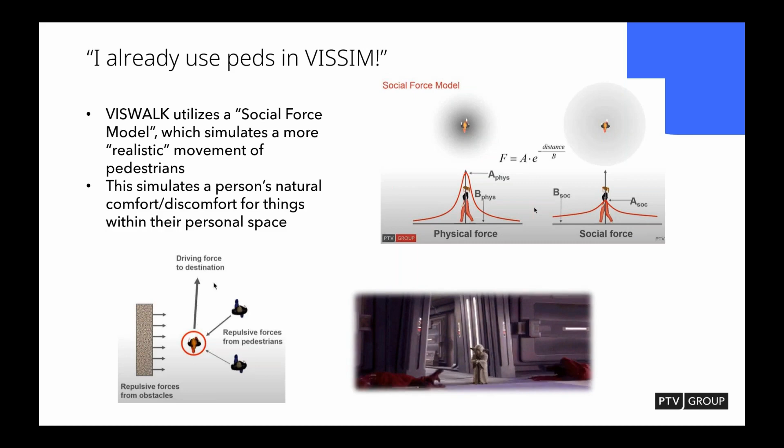Another question I get a lot is, don't I have VisWalk already? If you take a look at Vissim and ask it as an add-on, how do I get it? How do I bolt it into my software? But wait, aren't I already using it?

If I open somebody else's model, it doesn't say VisWalk not enabled. You might have noticed it right there in the corner. VisWalk was originally developed as an add-on to Vissim, but from a software functionality standpoint, they are married together in the way that they're in the same GUI.

Where you've got to look is in your license file here. I'm guessing that most of that 61% of you, and probably another 20% beyond that, your number there says 30. And 30 is the default in Vissim that says you don't have VisWalk. I know that's super confusing, but the reason it's in there is both to show functionality and to allow the building and sharing of functionality between models, without having 1,000 different versions of Vissim and bolting it on.

And did I do it correctly? Did I export it to a different software correctly? All of that stuff is unnecessary. It's already in there. What you're buying is access to populating your model with pedestrians.

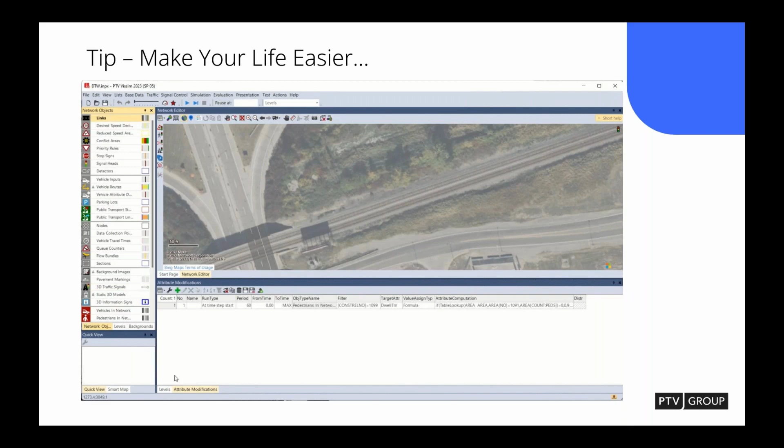Here's a little tip and trick for y'all. You can actually turn on the components that you want to see and only see those. So if you're doing a VisWalk only model, you can turn off all vehicular components. If you're doing a Vissim model, you can turn off all your VisWalk components, and vice versa, however you need. That kind of makes model building a little bit easier, and anything that makes my life easier and doesn't replicate and doesn't make me get confused, I'm all about.

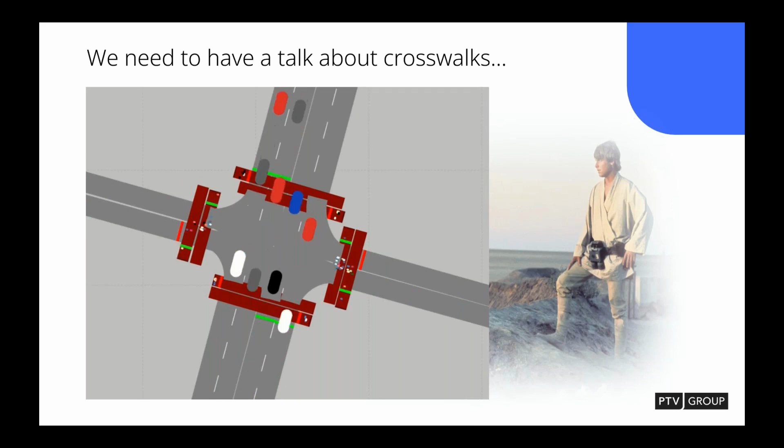So let's move on, we need to have a little talk about crosswalks. I think anyone who's ever used Vissim may be familiar with this picture. This is what we call the classic view of pedestrian modeling in a Vissim model. There's nothing technically functionally wrong with this model, it's just so 1990s, early 2000s.

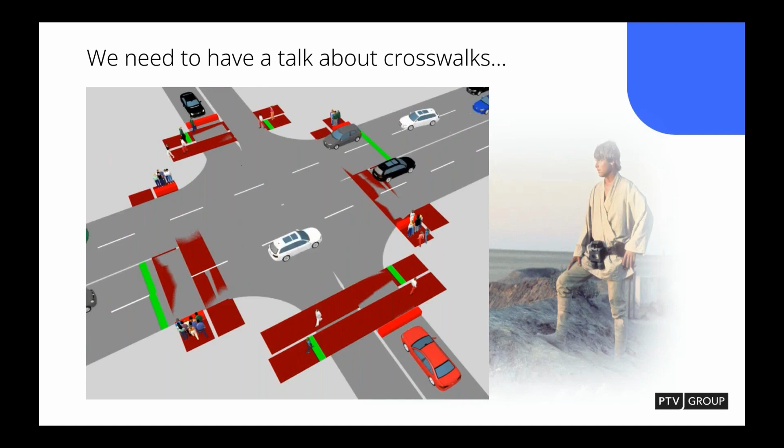And the way I like to think about it, let me see if I can get to the next slide here. When you think of a city, what are humans? The traditional component of using pedestrians with vehicular following models just isn't reality anymore. Cities are more vibrant, people move within each other, they use the micro capacity of the system. There's a lot of error in their movement together.

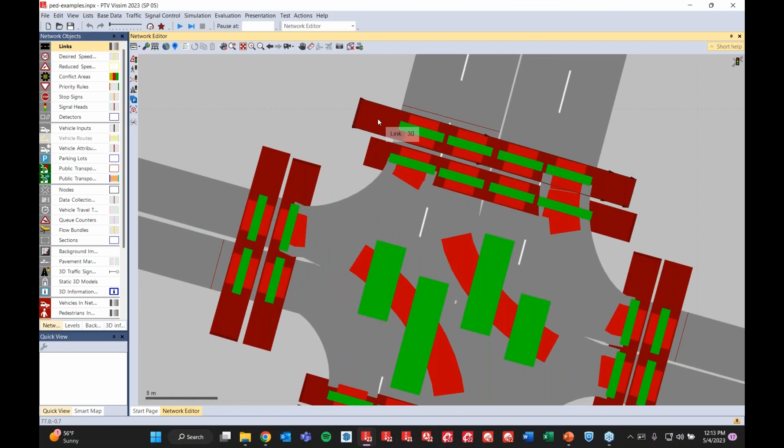So here on the right, you have your traditional model. Makes perfect sense. You have your pedestrian inputs, you have your walking ways, but these are actually vehicular links. And when you get in here, you do have this footpath, no interaction. But this no interaction setting deactivates the vehicular elasticity in the Vissim model to prevent collision, right?

And that in its inherency means that pedestrianization in this way is simply a reflection of the Highway Capacity Manual's idea of capacity of pedestrians, and not the realistic idea that you should think of it like particles within a limited space, right? They bounce off of each other. That can both be negative and positive depending on the situation.

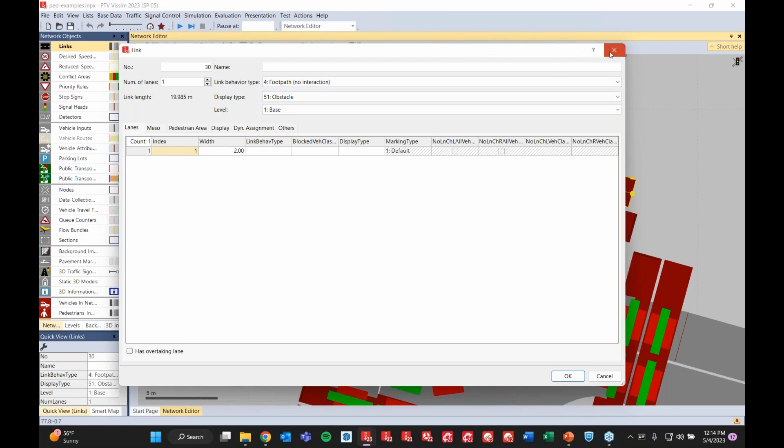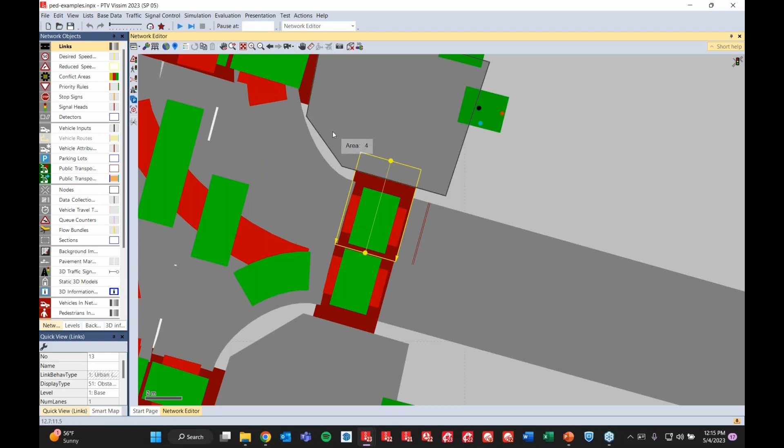A more realistic way of building a VisWalk model is like this. You have your waiting area for curbside on each approach, and in Vissim, if you click on your link, you'll have a component called pedestrian area. When you click this, most of the vehicular components related to the following model are deactivated, and the link functions more like a pedestrian area and less like a vehicular link. But since it's still a Vissim link, you can add in the conflict area between vehicular and pedestrian movement, which you can't get with a regular area. So this is a much better way of doing it.

All right, fingers crossed. I'm going to push play here and let these models run a little bit.

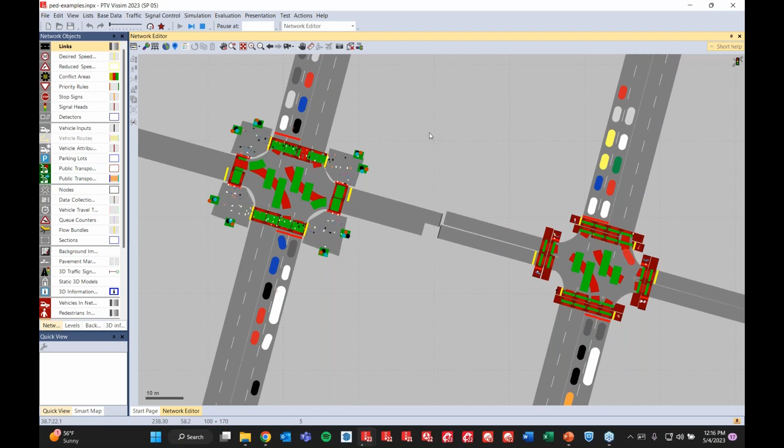I was going to make it more of a surprise, but both of these models have the exact same amount of vehicles, the exact same pedestrian demand produced at the same rate with the same destinations. But watching it over a few seconds, you can immediately tell there's a major difference in the functioning of capacity and the roadway, whether it's the green time for walking, the clearance time, or the friction between the pedestrian entering the roadway and getting to the crosswalk, and everything in between.

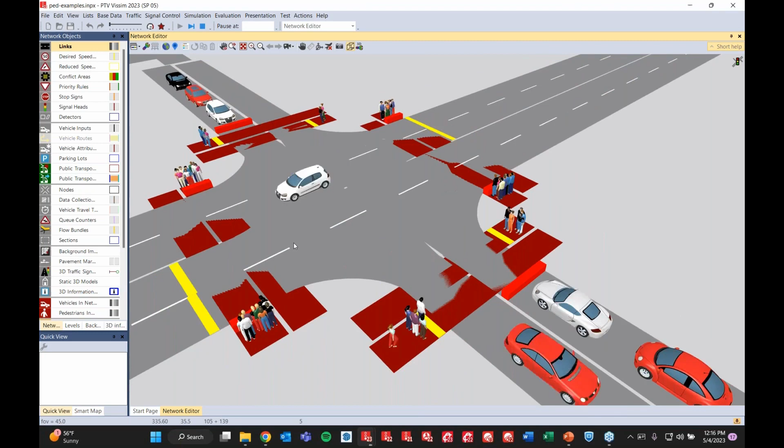And then when you put it in 3D you get an even better idea. This is what I'm talking about, that robotic thing here—when you're using the vehicular following model with pedestrians, they just kind of walk like cars. Whereas if you come over here, this is the exact same demand but using a realistic static demand.

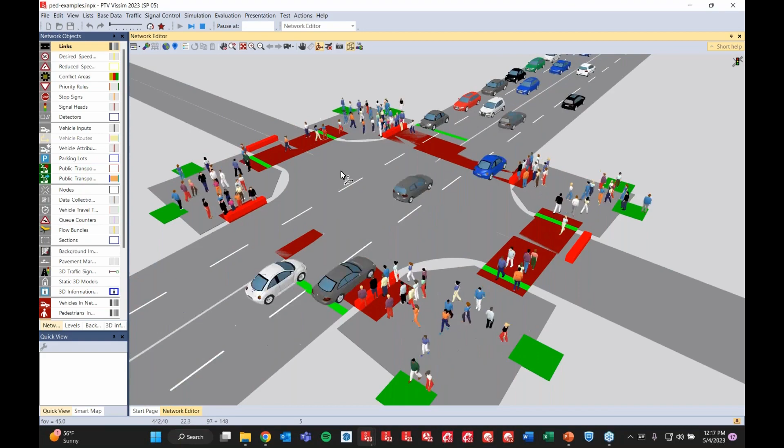The people are walking to their destination. They're trying to avoid other pedestrians, trying to do things reasonably, reacting to the environment in a realistic way.

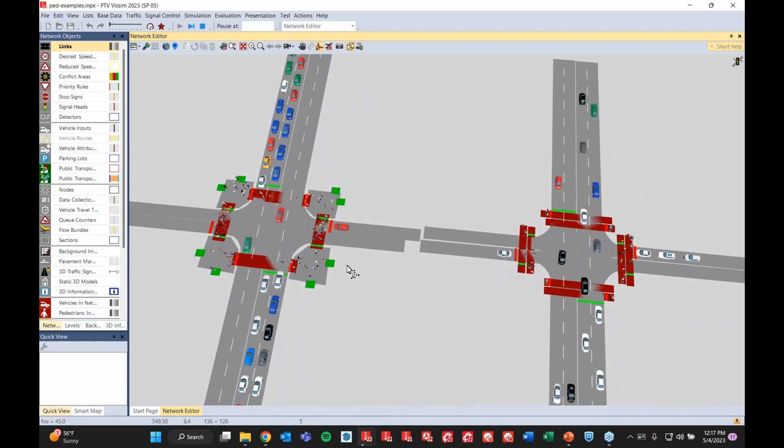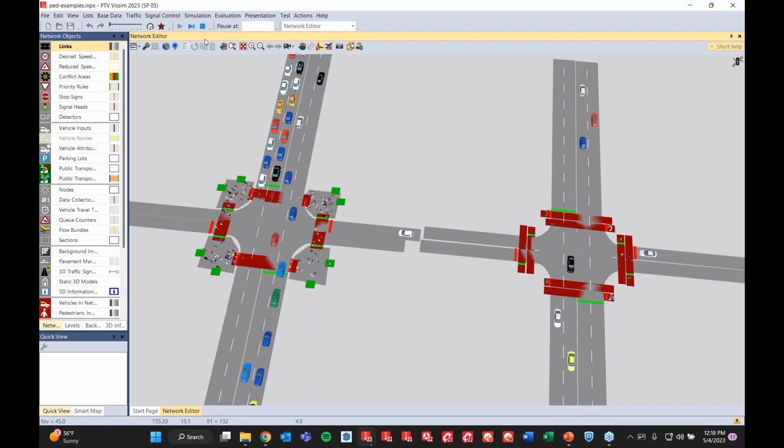Immediately we can see that if you're looking at a VISSIM model or design—and this is the simplest design you can get—in terms of pedestrian capacity, safety, the ability to measure elderly people crossing the walk, people with limited mobility, the realistic right turn factor versus the highway capacity right turn factor, the breakdown of lanes, signalization, and even advanced signalization—just something as simple as a crosswalk shows the major difference between using VisWalk for pedestrianization versus the old way, the highway capacity or synchro method for pedestrians.

All right, we're going to go back to listening to me drone on a little bit.

All right, the curbside strikes back. Curbside means a lot to a lot of people. To some it's the end of your journey, to some it's the beginning of your journey, but to VISSIM and VISWALK it's more like the transition of your journey.

Let's see if this video plays, I'll give it a second. For anyone who came to the Detroit airport presentation, you'll recognize this—this is the point of the airport model where the cars are dropping off the pedestrians into the airport.

This doesn't really look like a lot. Sorry, I need to turn off the auto on my thing.

It may not look like a lot, but this is actually the transition point right here, where once the pedestrian enters that crosswalk, the waiting area exiting the bus stop—which in this case represents the drop off. Oh come on, take a break. I apologize for my technical errors here.

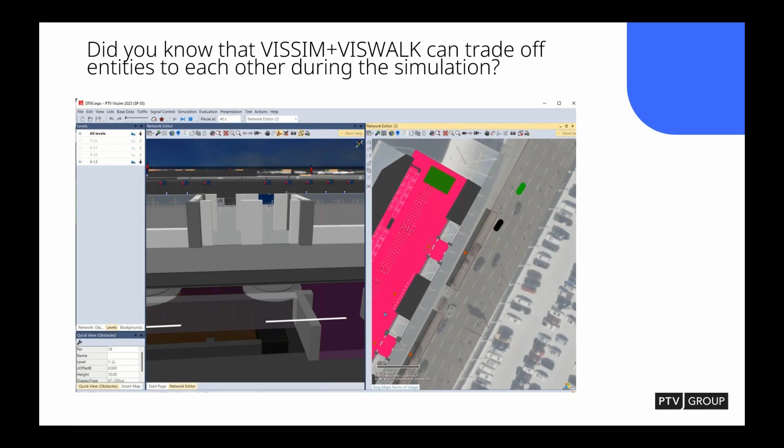So that's basically the transition point between where a VISSIM model becomes a VisWalk model, and you can do vice versa with parking and with boarding and alighting of transit vehicles, the public transit vehicles.

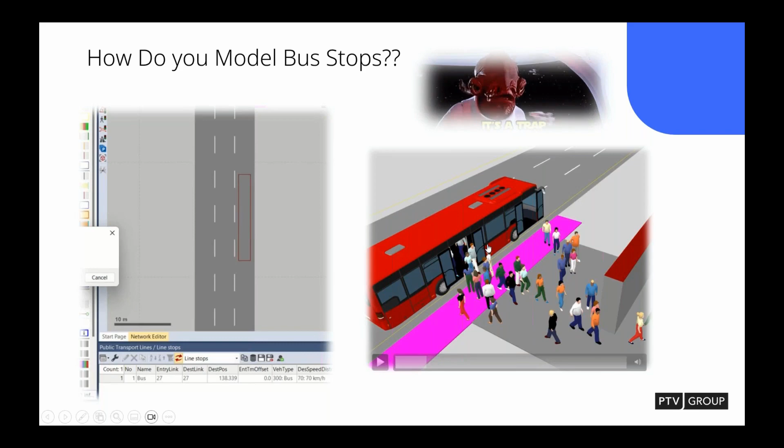So very few people actually do this the correct way, and that's because if you look at this slide, I pulled this straight out of the VISSIM manual on page 1005 under 4.2.22.2 quick start guide, and here's the map right here. All the stuff is built into VISSIM natively to do this, and here we've got a bus stop, which I'm going to show you in just a second. You should write this down, page 1005, because I have that on a sticky note on my desktop so I can find it for this map of all the different components. But I'm going to show you the components because it's a lot easier.

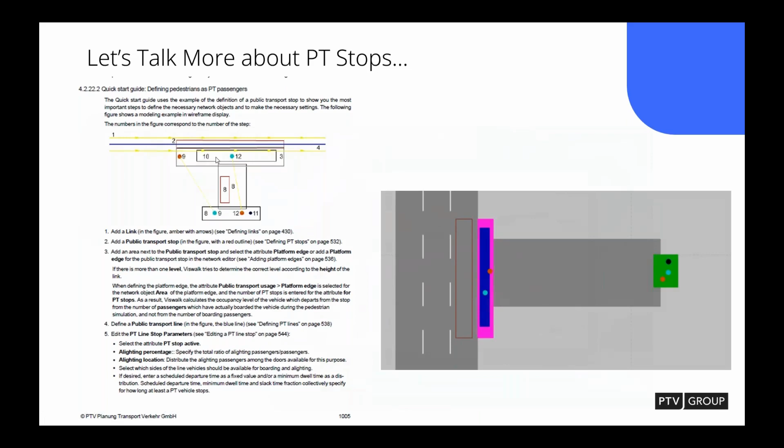All right, so let's do this again. Let's move it into our nerd view here. All right, here's the map I just showed you.

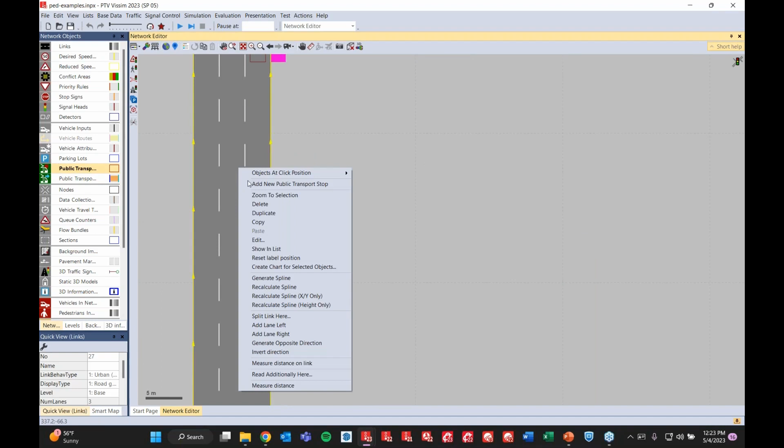This is what I'm talking about, a precipice or boundary between the VISSIM and VISWALK models, because in order to get this integration, you need both the VISSIM and VISWALK components, right? And they're natively built in. Because if you make a normal public transit stop, you just get the normal boring boarding data like that.

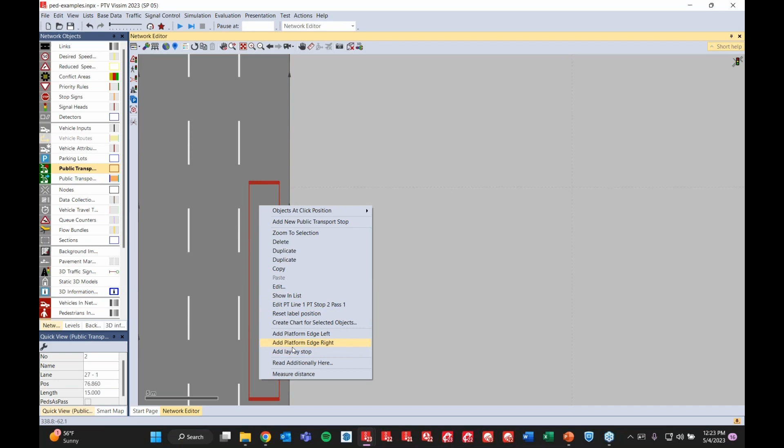However, here you can actually, if you come to this stop, if you create a new one, let's just do that. You click here and you've got all of these things built in right here to use with VisWalk down here. Add platform left, add platform right. And when you add a platform right like that, it automatically creates the platform in the place it needs to be to start the VisWalk model, right?

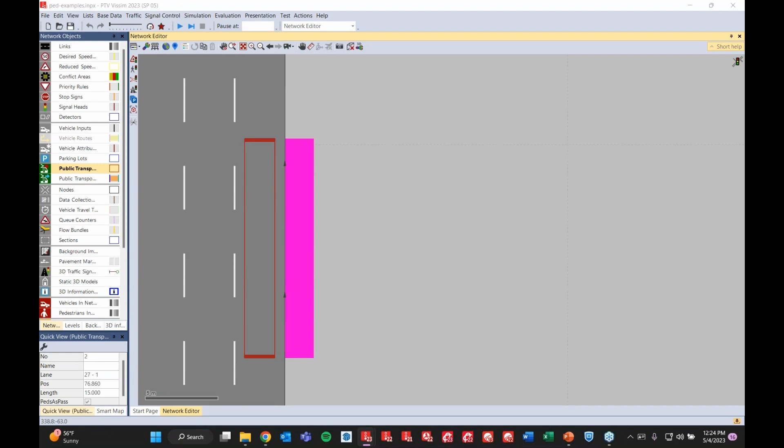And now you have this line here, edit PT stop, and you've got your more detailed public transit stop stuff, right? The doors and stuff need to kind of match in your vehicular component. I'm not going to talk about that right now because that's more of a VISSIM thing, but you can reach out to me if you want to talk about it.

You have to build the doors into the model by telling them where they are, but then you can come in here and tell them at each stop which doors are possible, right? So if it comes to a stop, if you say all the doors can be used and it comes to a stop on the right, it will only use the doors on the right. If you come to a stop that has both, they will distribute evenly based on their VisWalk destination, kind of.

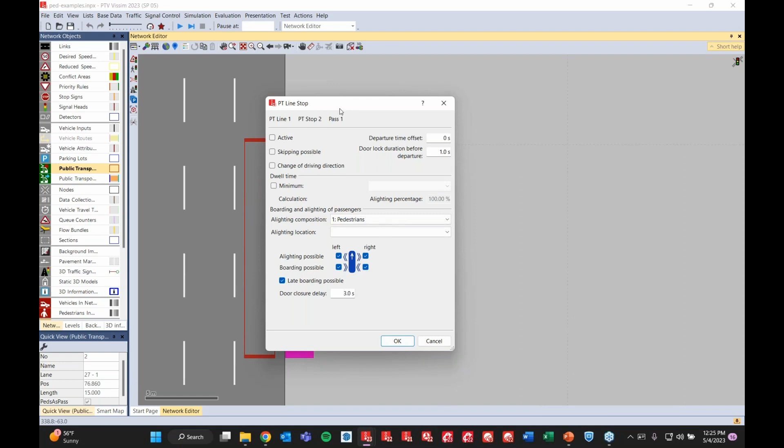And you can build different waiting areas, but basically the boarding area, the picture here, this pink area, the door has to be somewhere within this area. Generally stops are a lot bigger. You've got late boarding, you can change compositions for different stops. You can have skipping possible if there's no pedestrians or no boarding.

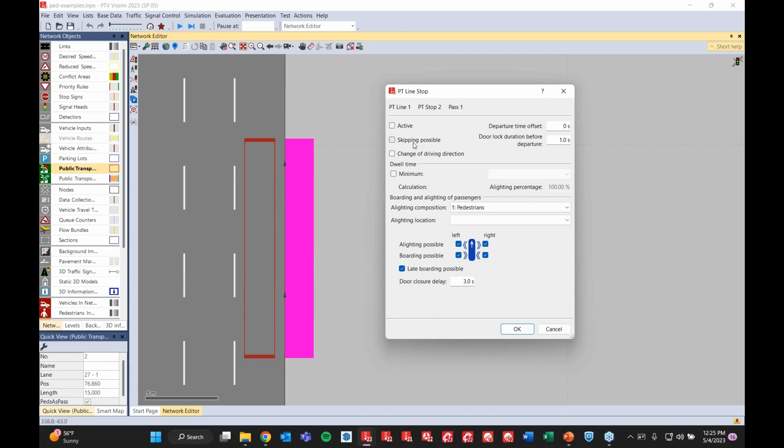This is actually really interesting. I'm not 100% sure, but the skipping possible, they will pull away if someone's running to the stop but not close enough, which is actually kind of funny when you see it in 3D. But you see there's a lot of cool components here.

But these are all the components that are necessary. This is the simplest way to describe it. In my airport model, it did the same thing. You need to have a starting point and you need to have a platform edge. But within your platform, you need to have your waiting area.

And this is one of the misunderstood things, you need to have this waiting area within your platform area. It can be multiple ones. You can have 100 different waiting areas, but it has to be within. And when you create the platform, it will automatically set this information for you on the second tab of your pedestrian area, platform edge, and set it to the bus stop that it is here.

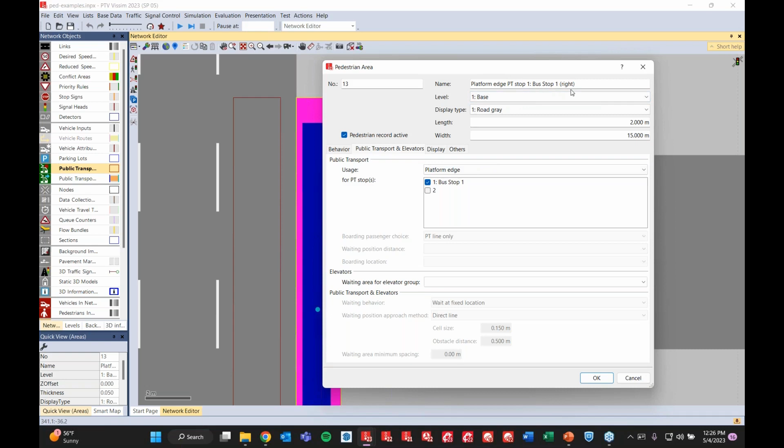This is also, I've said it in every talk, why I recommend naming your things, because it's really hard to come back and see bus stop 1, location 2, location 5. None of that stuff means anything. Platform edge, PT stop 1, bus stop 1, right, that makes a lot of sense in my presentation and demonstration, but it doesn't make a whole lot of sense when you're coming back doing reports and models and client presentations.

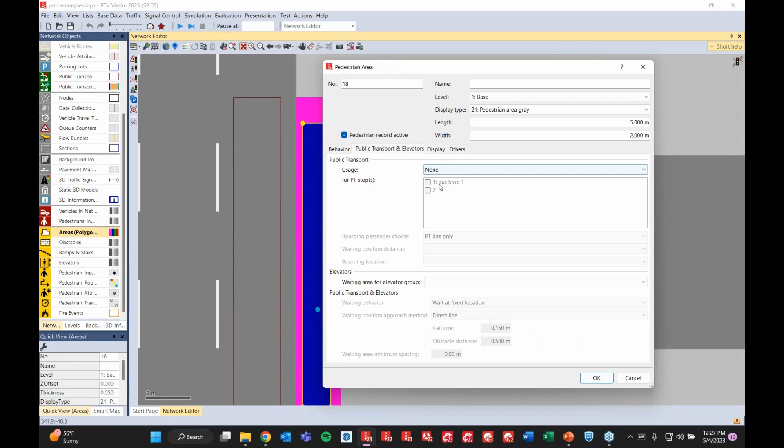So that's set automatically, but when you make your waiting area, you have to come in here and set the waiting area, because when you make a new area, it's going to be blank, right? So you have to set this in here. So when you're going into the PT area, you have to set your destination to the waiting area.

Right here, this red to blue. When you're coming off of the bus, you have to set it to the platform edge, not the waiting area. So the people getting on the bus go to the waiting area, and the people getting off the bus start at the platform. Then you have to tell them where they're going to go, because if you don't, they'll just disappear as soon as they get off the bus.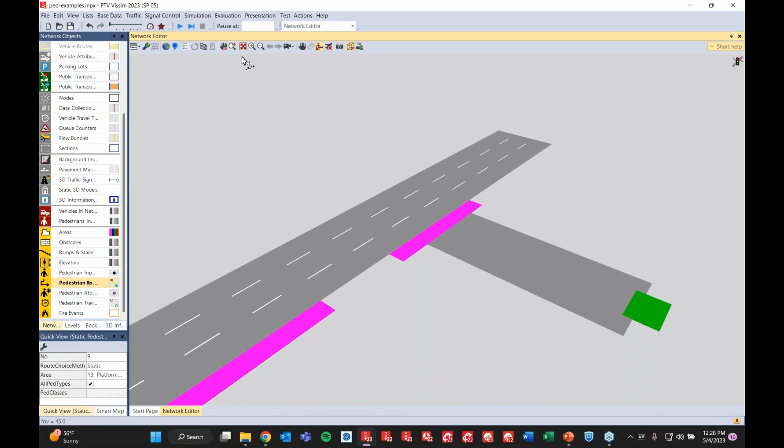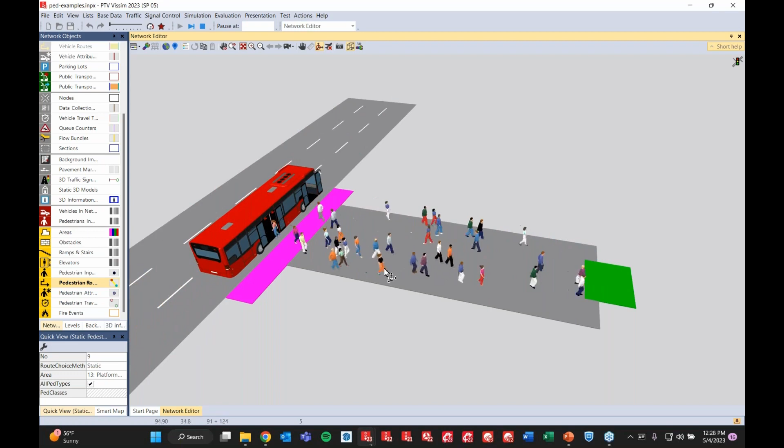So if you do it right, you should end up with something like this. This is dynamic, which means that every time you add something, people will just function to that thing. All the components are already built in. Maybe it's better to show an example. Let's just throw this guy in here.

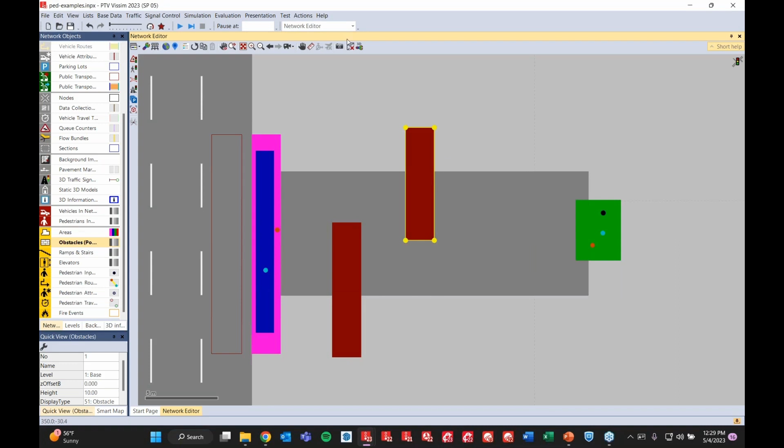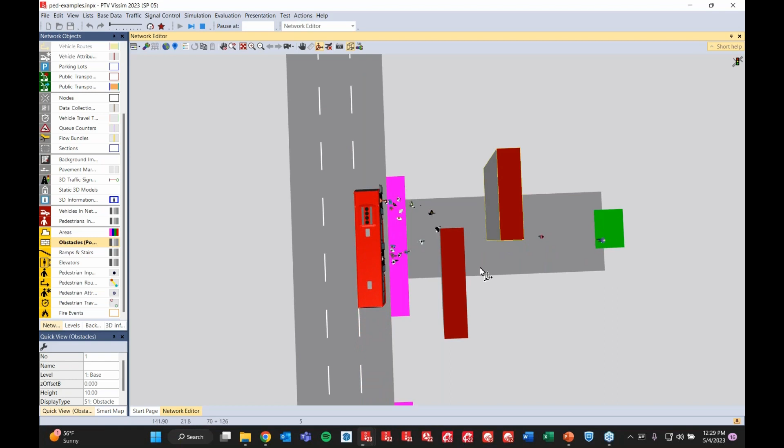So this is a good way to use VisWalk to stress test different designs super quickly. You can see that the people getting off the bus affect the people trying to get to the bus, see, he missed it, oops, because the demand is getting off. You would never capture that in formulaic analysis, which is why we always recommend using VisWalk for public transit studies.

All right, I'm going to stop that there. Maybe that would be a good place, Tiffany, for question number 2.

Okay, question number 2 is, do you have any projects that require more robust pedestrian simulation treatments or analysis?

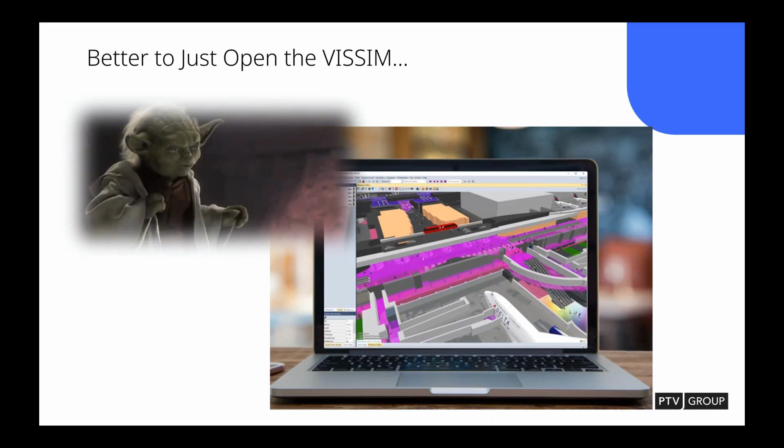And all these airport models and train station models, still it's not really much of a thing, but it should be. I remember working on complete streets projects in New York and across Europe. People want pedestrianization, cycle modeling. We just at PTV wrote the guidance for modeling in the UK for pedestrian modeling, and we really support our customers with pedestrian modeling because it is the next big thing.

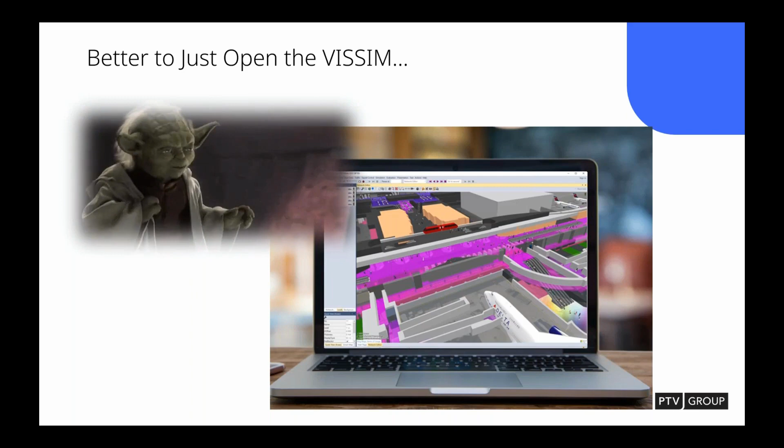And Viswalk is moving into an interesting world, especially with some of the MovePed things coming in the next couple of years out of Viswalk, with more fully articulated pedestrians, better behavioral models, and more realistic queuing models. It's an exciting world.

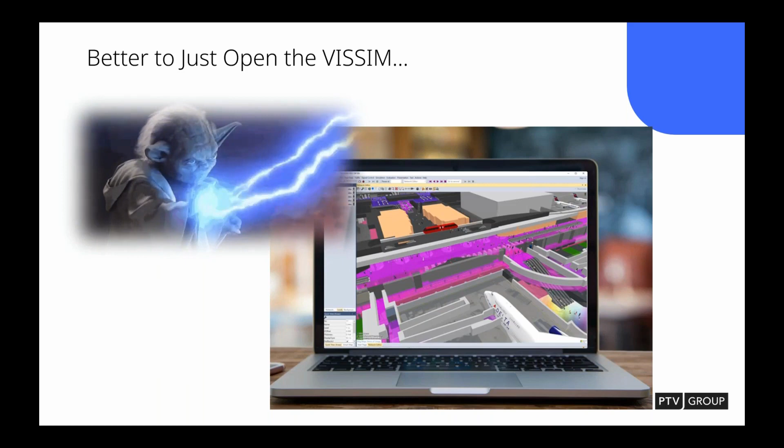So let's move on. Rise of the attribute modifications. You may have recognized our master of training over there, Levi Button, has given a few presentations and UGM things on attribute modifications, but attribute modifications really do change the way VISSIM and VISWALK work. People like me who have used the DLLs and the APIs and Python and Visual Basic scripts since the beginning of time, and they never quite work right. So the idea is scripting without scripting. We're building functionality directly into VISSIM, directly into VISWalk, to make the model better for our users.

So this is an issue I came upon the other day. I wanted to make a very realistic representation of a taxi queue. I was kind of basing it off the one at LaGuardia from when I lived in New York, where you wait at the head of the queue until you're assigned to a vehicle, right?

It seems very easy. I did a lot of the service point queue selection stuff in airport modeling, and that stuff works really well. However, there's a bit of a timing problem with things like this, that VISSIM and VISWalk give you an exacting capability to overcome.

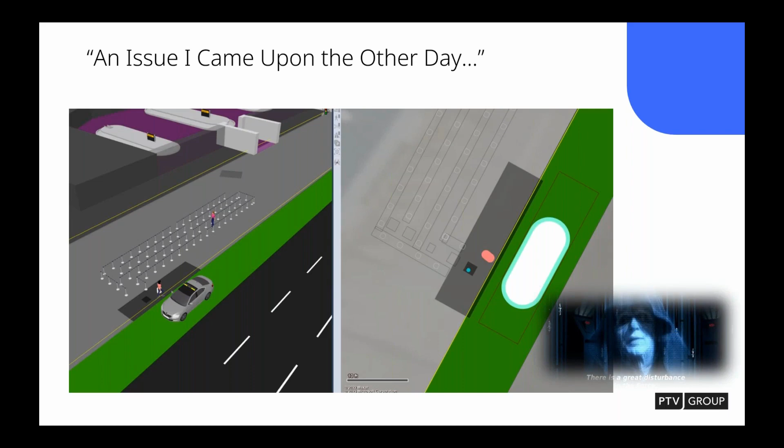So this was our discussion area. For some reason I've deleted my second text slide there, but I had two ideas of how to really accomplish this. Those squares are areas, by the way, routing areas, the path of the pedestrians through the queuing tape.

So the first idea was, well, maybe if I just make the waiting area—see, that dark black area is the waiting area for the transit stop, that's the one taxi working as a transit stop—maybe if I just make the waiting area really small, then only one person would wait in it. Oh, how I was wrong.

In Viswalk, natively, there's not any kind of thing that says the waiting area size has a lot to do with it. It's kind of a capacity analysis thing. So all I did was get a huge queue of people waiting in a semicircle to access the area that they couldn't get to, which didn't really work.

So the second idea I used was the service point selection, much like a queuing area, right? I wanted to say that the black area with the turquoise dot in it would only let pedestrians wait until that area was free.

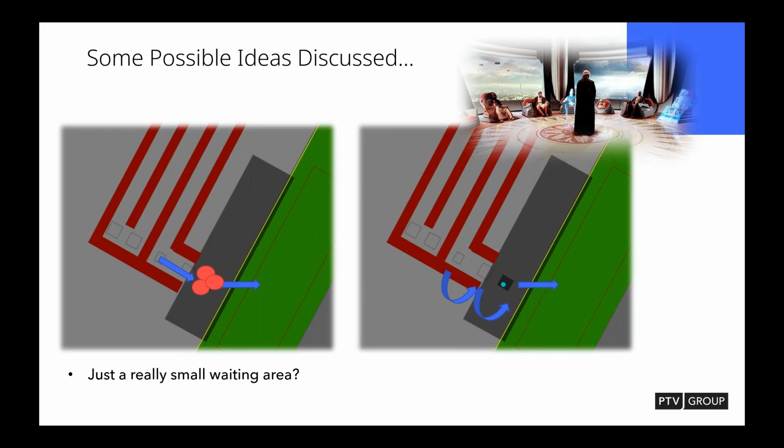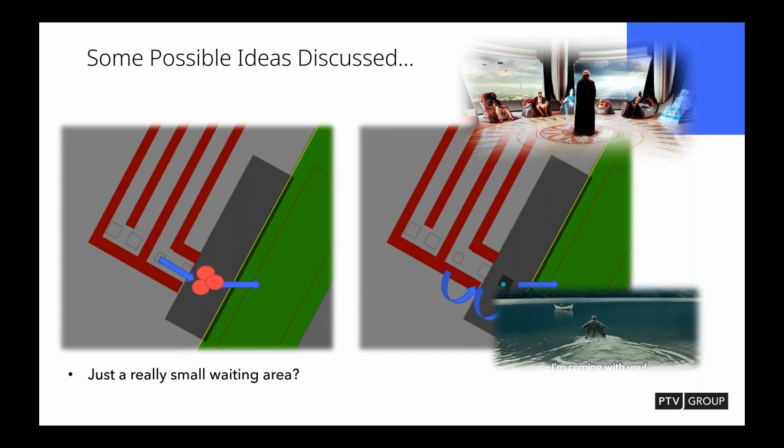However, the thing that I didn't take into account with the way that VISSIM and VISWalk works is that the idea of the service point selection doesn't act like an IO gate for the usage of the area. Any pedestrian who went on to the next area, as long as the taxi was there, just jumped in the taxi with him. There were no gates. The waiting area was only for the public transit vehicle. So that means that as long as the public transit vehicle was still in the stop, the gate was open for more and more people to just tag along, even if they weren't invited. Big fail.

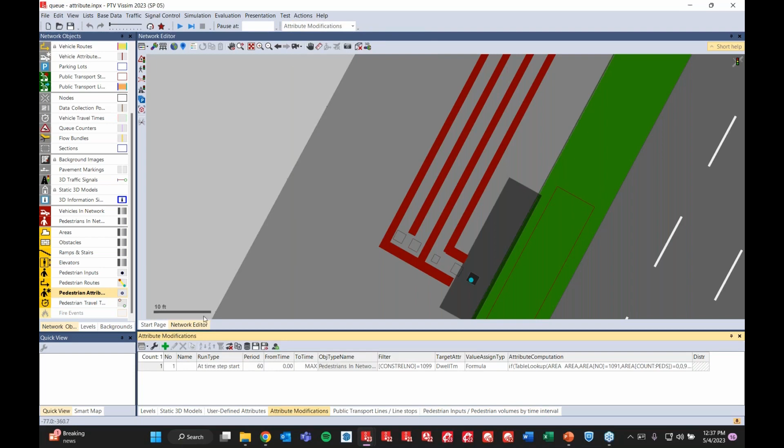So Levi actually taught me how to do this - this is the preferred method that I worked out with him based on his advice. For some reason we put all the attribute selections over here. You've got your vehicle attributes here, your pedestrian attributes here. However, what we did wasn't actually either one. It's right here, the global attribute modifications - the second to last tab under actions. You click on the attribute modifications, right? And I've got this guy right here.

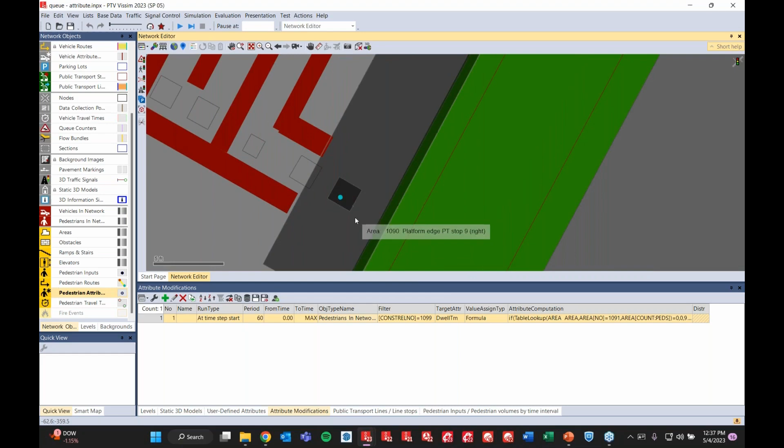So looking a little bit at our model - what we wanted was that only one person would wait here and get in the car. And they would only proceed to the queue head to wait to talk to the agent once that person got in the car and drove off. So what we did was we used all of the elements within attribute modifications, as well as other elements within the model, to kind of cheat this.

So I don't know if you know this, but with a pedestrian model, you can set this tab here under behavior time distribution to anything you want. So here I've got gate holding time for an hour. There's this other tab down here too, which is kind of cool - I used this in the airport model. Waiting time is relative to simulation start. That means the gate opening is an hour from the simulation start, so if someone arrives 20 seconds before the end, they don't wait for an hour.

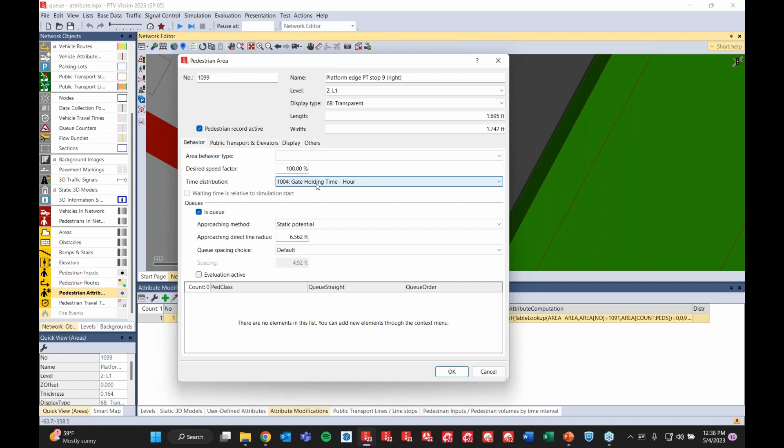But that's not relevant here. So I set the time distribution to an hour, and if you don't have a distribution, you come into your base data under distribution and time. So under here, down here, I have an hour - I mean, I guess I don't really need a time distribution. You can set a standard deviation; it really should be 0, but I'm not going to mess with it right now.

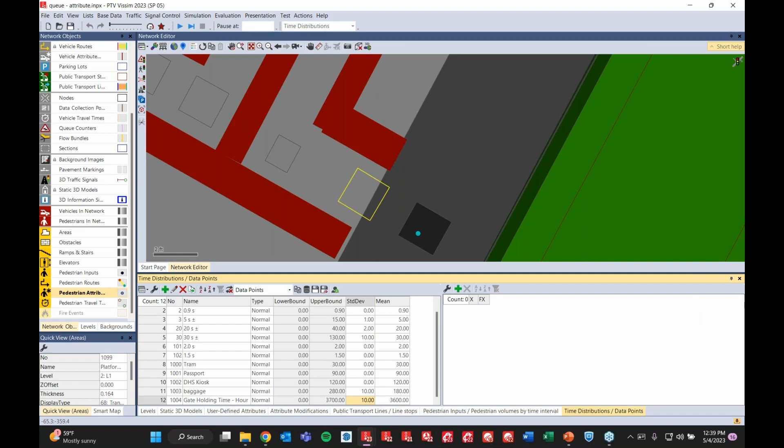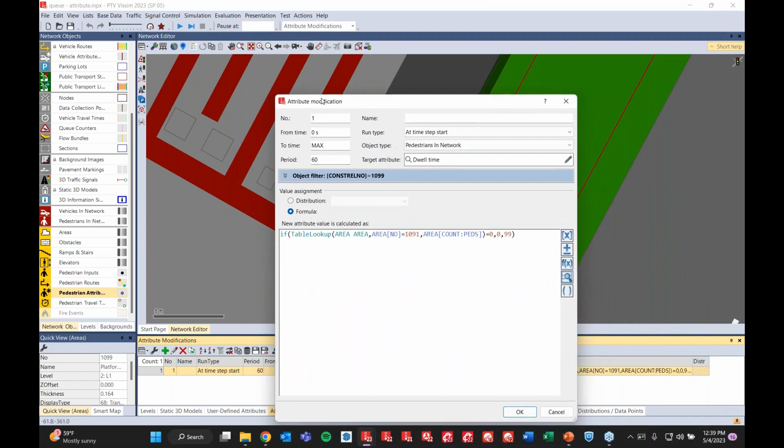So what happens is this: when a pedestrian enters this square here, basically they're held for an hour. However, through attribute modifications, I can edit VISWalk to act however I want. This is kind of, I don't know, if you know SQL, it's very similar to SQL but not exactly the same. So your construction element here, 1099 - unfortunately I have to click out of this - so there you have your construction element 1099, platform edge PT, and then you have your 1091 here.

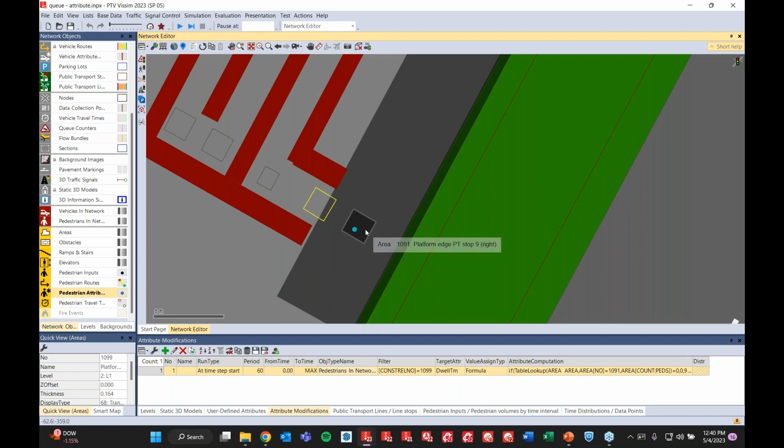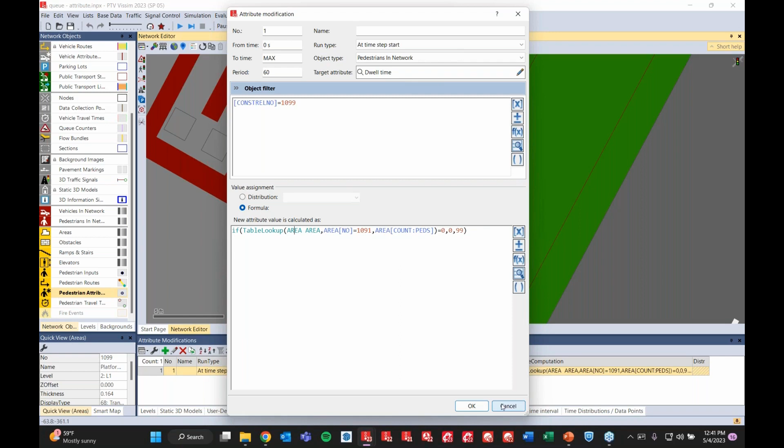Area is the waiting area. So if you open up here, you can see this formula affects this filter right here, this 1099. And here's your table, this is your SQL lookup. All your data, I believe, functions through the SQLite database. So when 1091, the waiting area of the pedestrian, has 0 pedestrians in it, then you need to set the dwell time target attribute up here in your upper right to 0. Else, basically do nothing.

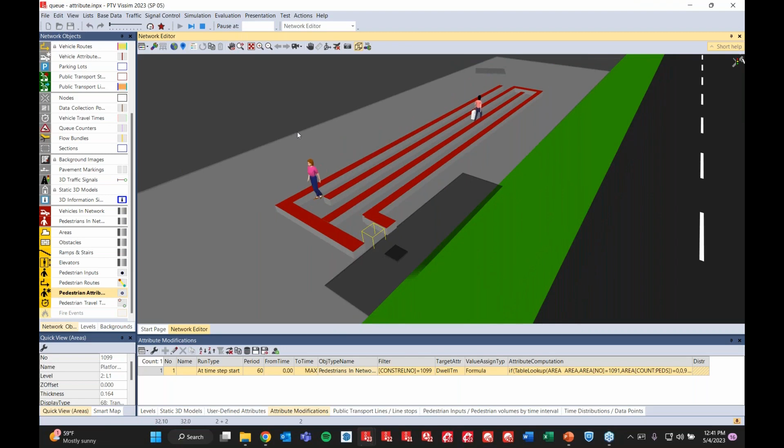So what happens is when you run your model, right now, since nobody is here, this waiting time is 0. You also should set your components of your model so that they wait for people, but I was too lazy to do it. All right, so there you go. Wondering if we could go farther into the future and see people actually queuing. There we go. All right.

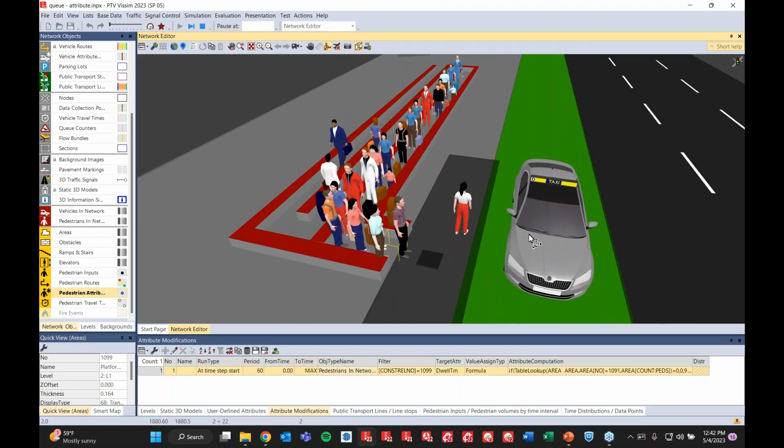See, and now they don't go to the queue head until the availability. It's important to set the capacity of the taxi, because the default for a single occupant vehicle is 2 people.

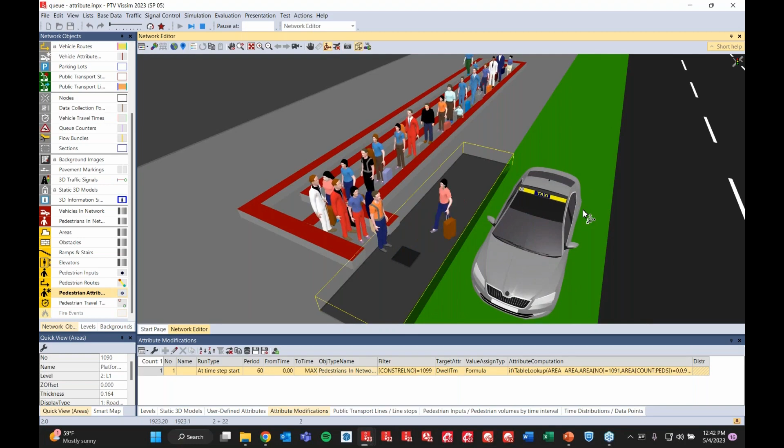See, that person was actually pushed out, so they came back. So that's actually a really cool application of gating behavior, I like to call it, using global attribute modifications.

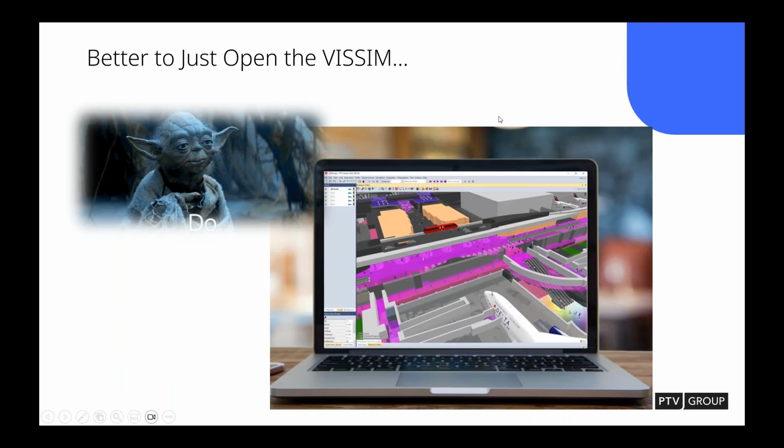Let's finish up with a bit of a thought exercise toward what we're working towards with our integration. This is what we talked about today. And you ask me, that's great and all, but what if I want my city to look more like this?

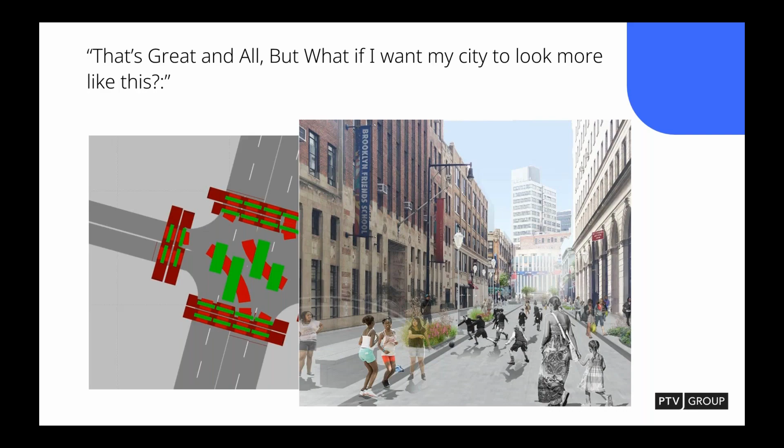Because, you know, it's the 21st century and we don't want to look like a global urban arterial. It's a cool little thing. Some people who saw it in 2022 might have seen this model in different contexts.

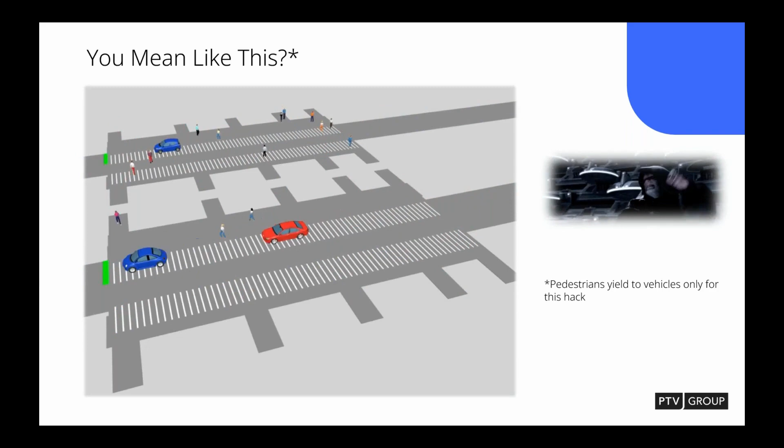This model isn't meant for cars stopping for people, but they will in emergency situations. This model is meant to show how you can get more flexible pedestrian movement, for more complex urban areas, like crosswalks and stuff.

I don't know if anyone from New York or San Francisco knows what I'm talking about, in morning rush hour when everyone's queued through the crosswalks and thousands of pedestrians walk through the queue of cars. So we've been working on this test model.

Let me see if I can open it up. And for anyone that's been in the field long enough, this definitely feels like Emperor Palpatine right there.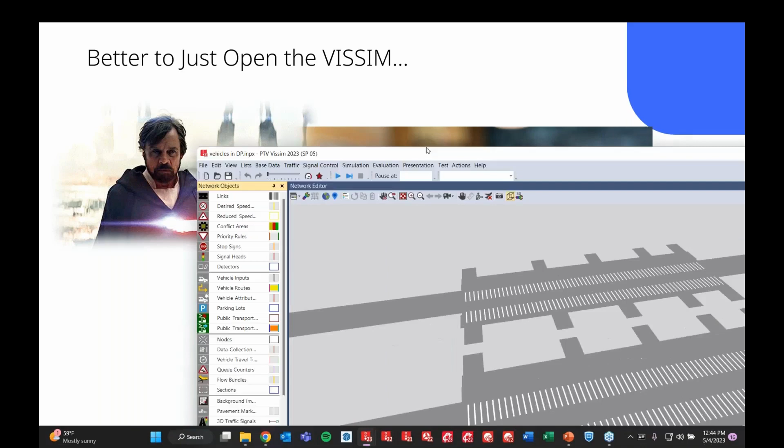Okay, all right, so here you go. So basically, the idea of this model was - I'm going to slow it down a little bit.

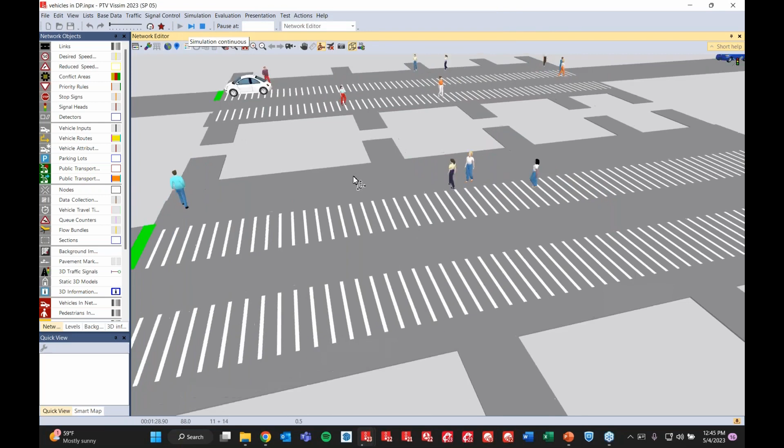It was to show the ability of fine interaction between routing. You can see the pedestrians are still ultimately attempting to find their most advantageous direction until they are presented with the idea of the car. In this case, they're trying to avoid getting hit.

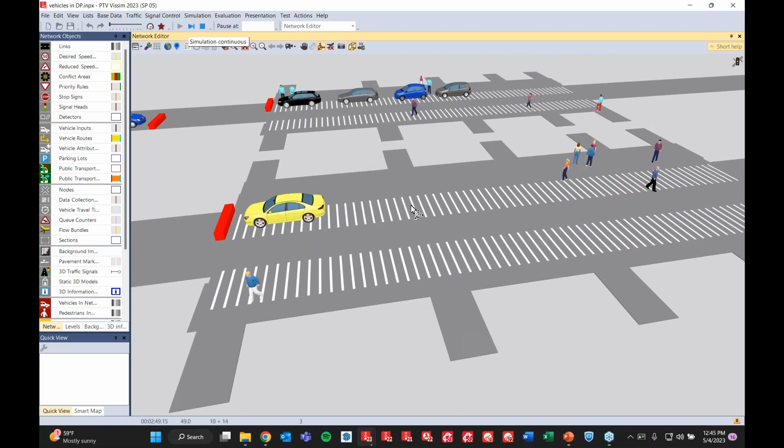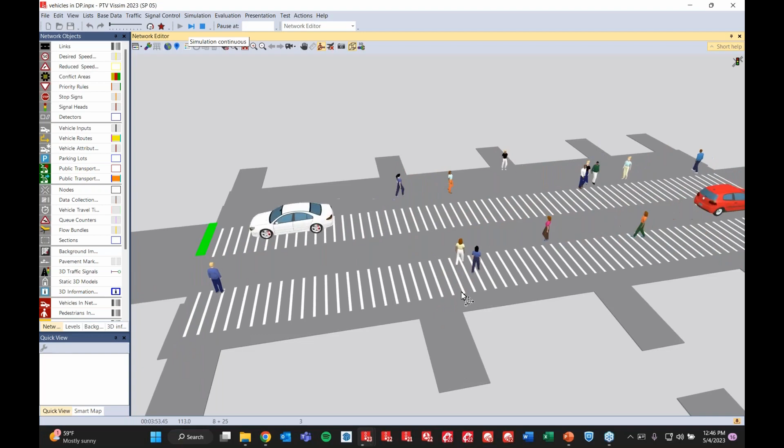You see their behavior changes quite significantly once the vehicle is present. When the vehicle is not present, they walk more line of sight. But when the vehicle does enter their sight, they become more aware, and they try to find the gaps between the vehicles.

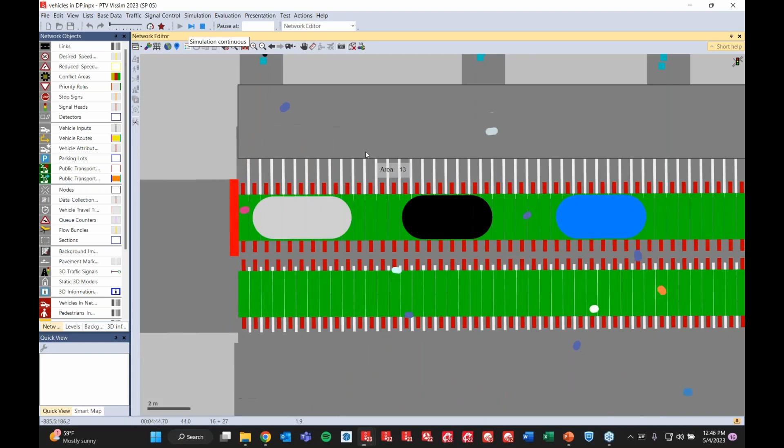And we've actually exploited a bit of a quirk here with the way the interaction of VISSIM and VISWALK works. So this is a pedestrian area link that has 66 lanes. That might seem ridiculous, but the way the interaction model works is that each little component of the lane acts as a vehicle-to-pedestrian conflict area.

That may sound a bit pedantic, but for the overall way VisWalk works, you can see that when no vehicles are present, they have free reign. But when the vehicle is present, they're only subjected to the conflict of that immediate small area, which allows them to find gaps between vehicles.

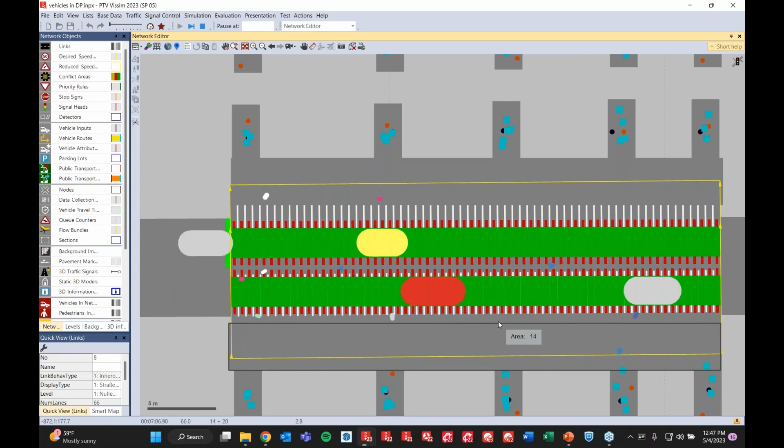This may not be an ideal situation for everyone, and this is actually something we've been working on as far as more advanced features in VISSIM and VISWalk. Not quite ready yet, but if you want to see something like this or want a copy of this, just reach out to me or to someone, and I'll be happy to pass it on to you.